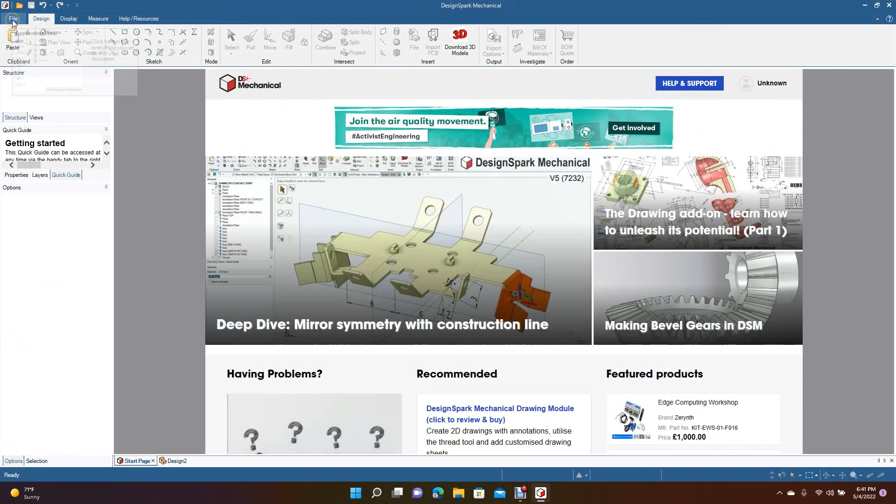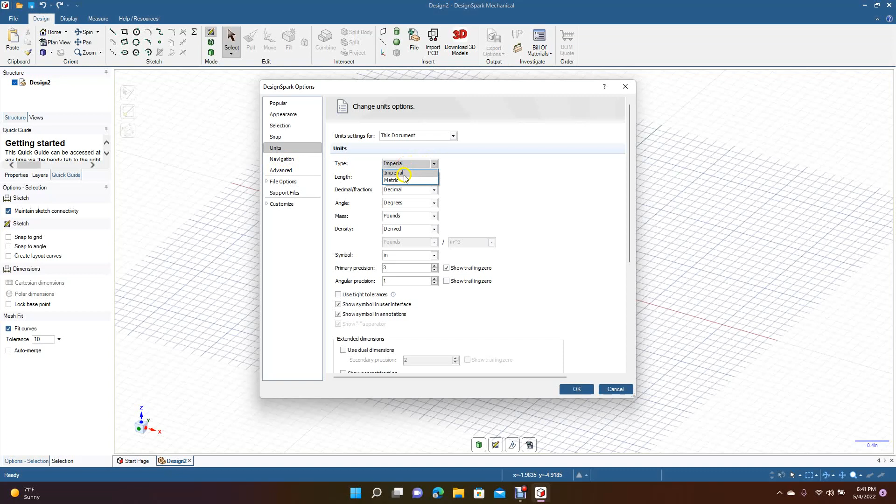We're going to come over here to File and go down to DesignSpark Options, navigate over to Units, make sure that we're not in inches. We want to do this in metric, which is millimeters. We'll click OK. Go to the design. Sometimes you got to do that setting a couple of times to make sure that it switches over. So go to metric, click OK, and when the grid gets smaller, you know you're in metric.

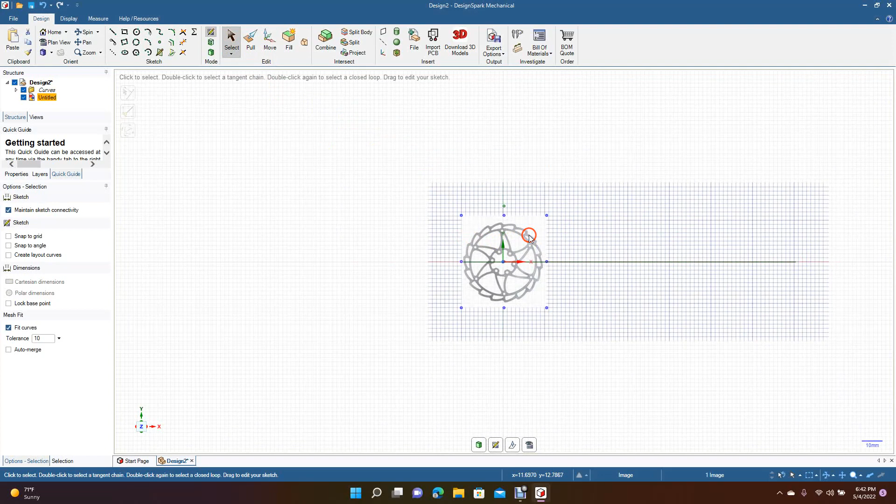So okay, we're going to go ahead and use this one as an example. We'll go ahead and put that in the middle best we can. We want this to be 160 millimeters, so we're going to go ahead and create a line right here as a reference, and then we're going to type in 160. This is going to get pretty big, but we'll go ahead and just scale that up. And we're going to go ahead and hold down Shift, and then we're going to drag these corners. Okay, that's way too big.

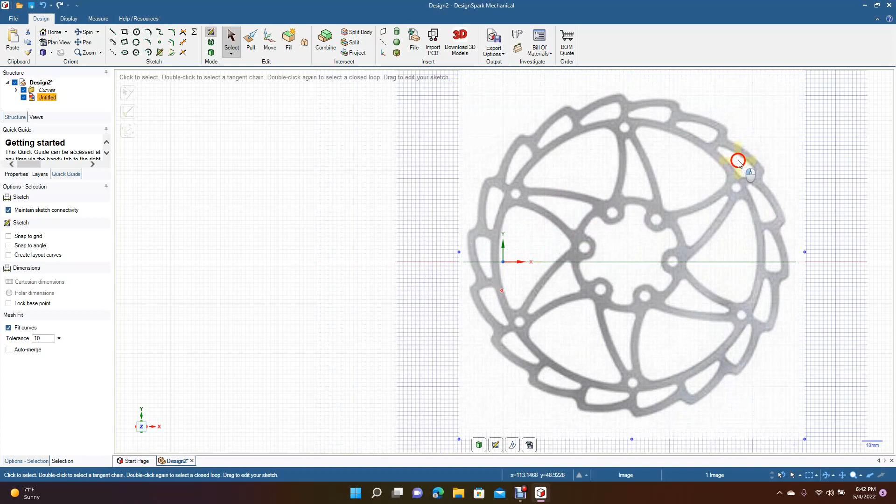We'll just go ahead and hold down Control. Just make sure that it just needs to be a little bit bigger. Probably right there is good. Yeah, a little bit bigger and that'll be okay. Hold down your Control. That should be good. Okay, we're going to get rid of that reference line that we created. And we're going to put this right in the middle there. Now we're not going to make this one exactly. We're going to kind of do our own thing, but I'm going to basically show you how to do it.

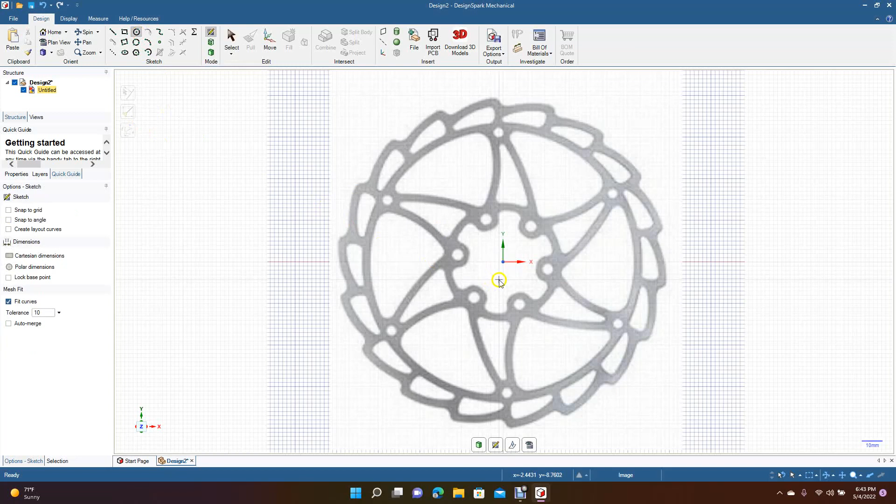So we'll go ahead and get the circle tool out. We want to put a line up here. Our first dimension is going to be 160. That's going to be the dimension of the disc brake. And we're going to get another circle. We'll go ahead and go up to here to draw this one. We'll just make this 134. And we're going to draw another circle from the center. And we're going to make this one, let's just go 126. That should be good enough.

Okay, now we'll put some of the smaller circles in there. This one's going to be 57, and then we're going to do another one where these circles need to be, and these circles are going to be 48 millimeter. So we're going to go ahead and draw a circle in the middle here, and we're going to type in 48. So this is about where we should be drawing these circles. So according to that little graphic we have, this 48 is from the center out to the center. Okay.

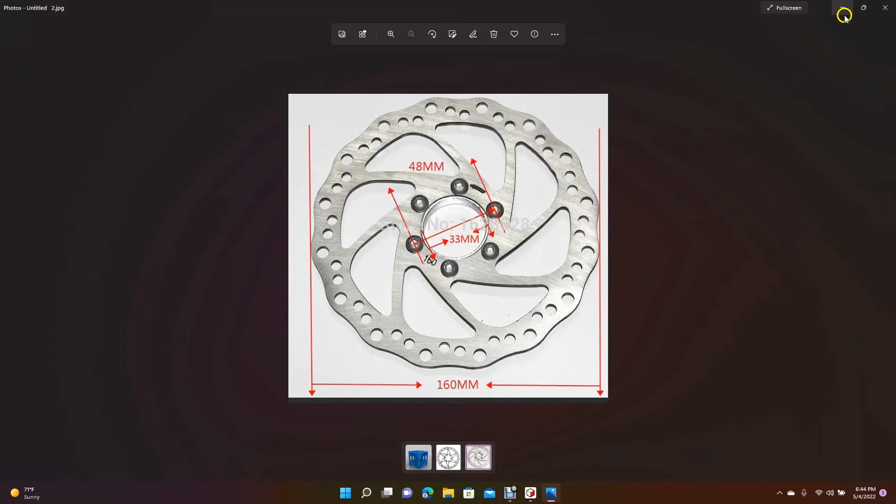And there's 1, 2, 3, 4, 5. There's 6 of them. Okay, so 48 from center to center. So what we got to do is make this a little bit bigger. So we're going to delete that and draw another one. Do this about 60. Okay. Right now we're going to go ahead and let's go Control plus. We're going to draw our first circle here.

I think these are going to be 5 millimeter holes. Yeah, we're going to go 5. Just move this around, make sure that 5 is good. Let's go get the move. Let's move this down. Yep, 5 millimeters should be good. Okay, so now what we're going to do is get the circle out again. We're going to drag one for the outer circle right here. And we're going to make this 14 millimeters. Let's go 14.

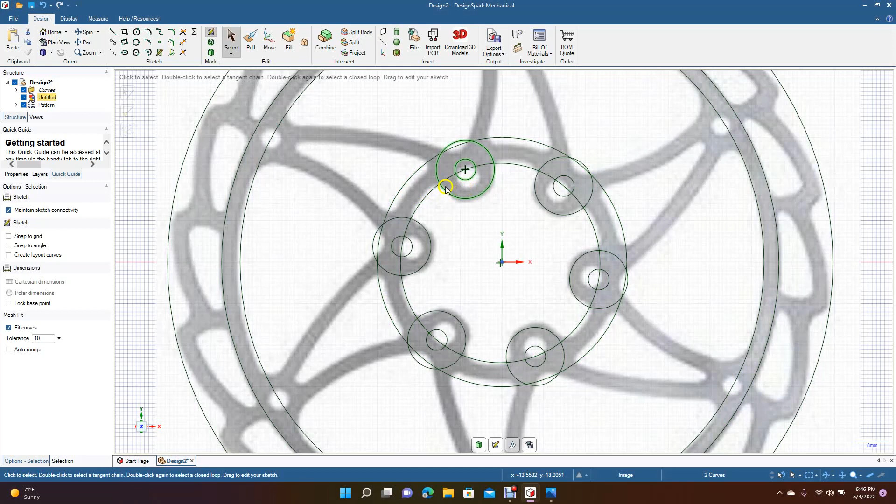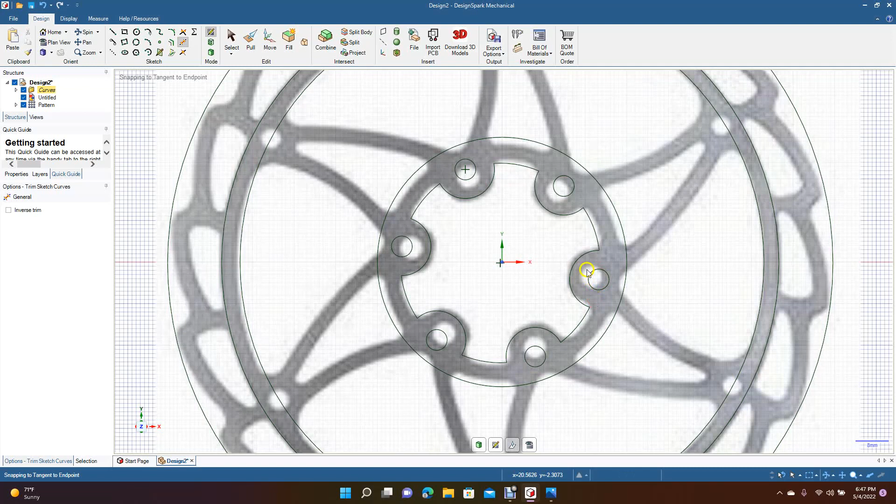All right, now let's get our trim away tool. We're going to start cutting these pieces here. Okay, let's get that one in the middle. All right, just continue around till you've got all these nice and cleaned. Oops, undo. Let's get that out of the way, and then get these two little inside pieces. Okay, outside, and then do the insides. Do the insides here, and then the insides of the circle. Okay. Let's get rid of those. Okay, that doesn't look too bad. We'll Control minus.

So that's going to be the base of our disc brake. Let's go ahead and pan down. We're going to have to create one of these here, and then we're going to rotate it around, but we're going to make our own. We're not going to do this exactly. So we're going to go ahead and do the 5 millimeter circle there.

And we're going to grab the circle again. Let's go from the center. We're going to make a 14 millimeter circle right there. Okay. And then we're going to draw these little pieces here, and then we'll just rotate that around. So we're going to go ahead and get our 3-point arc. We're going to go from there to there.

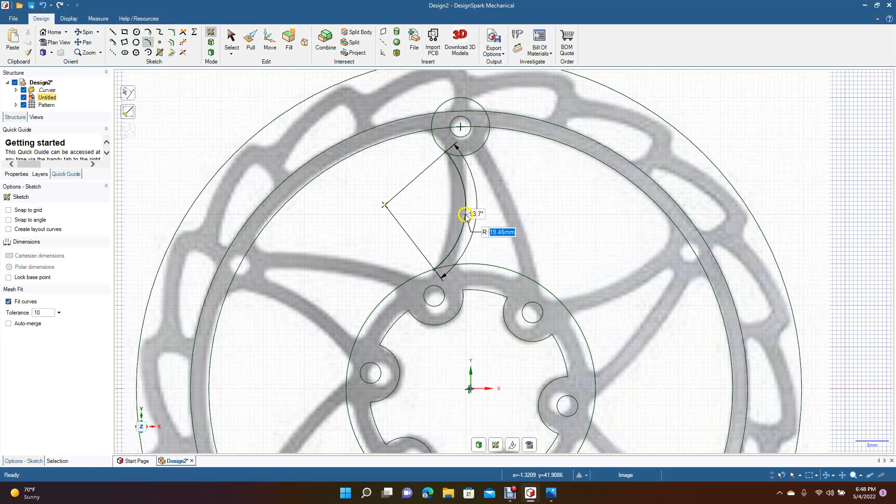Actually, I want this to be more, we're going to use our tangent arc. We're going to go tangent to these. Don't have to be exact. I kind of just want to do my own thing, so I'm going to use kind of a guide there. So we'll do a tangent line here, and then we're going to go grab that same one up here, and then we'll go, and I kind of want that to be curved.

Let's try the 3-point arc on this one here. Still not getting the right one. Let's undo that. Let's get that tangent arc. Let's try, go from there to there. And let's try the tangent arc again and go from there to there. That looks pretty good. I'm okay with that.

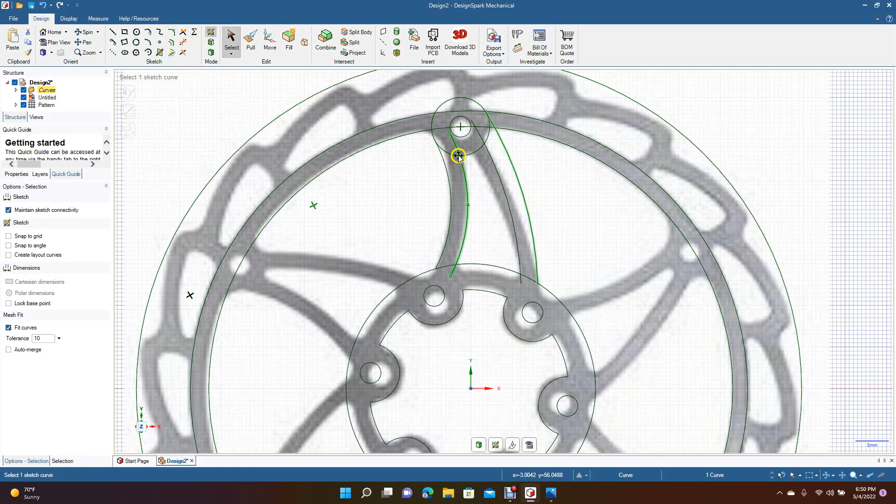We know that these lines are tangent, so okay, now we're going to get our offset, and we're going to offset this line here over. Let's go 4 millimeters and do the same on this one. 4 millimeters. Okay. Do I want to? Okay, yeah. Now we're going to go ahead and get our trim away. Let's trim away these.

And I'm going to go ahead and spin this around. So let's Control minus. Let's get our select tool. Let's go ahead and, oops, I didn't want to do that. Let's go ahead and click up here. Select what we just drew. Just what we just drew. We don't want to get anything else.

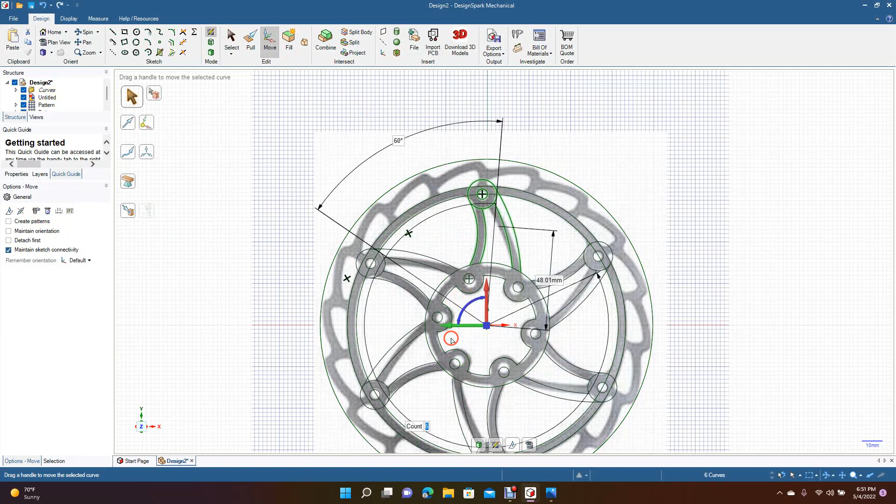Okay, now go ahead and select move. Go to create pattern. Drag this to the center. And then let's rotate this around. So we have 6. Go ahead and select to click off. Okay, that's looking pretty good. Okay, now we're going to go ahead and start trimming. So we'll go Control plus. We're going to pan down.

Get our trim away. Let's trim away this top piece. Let's trim away these inside pieces. Oops, undo, not that one. Or maybe I did want to do that one. Yeah, that one, that one, that one, that one there. Oops, undo. Okay, so it should look something like this. And then get rid of these. Okay, that's not too bad.

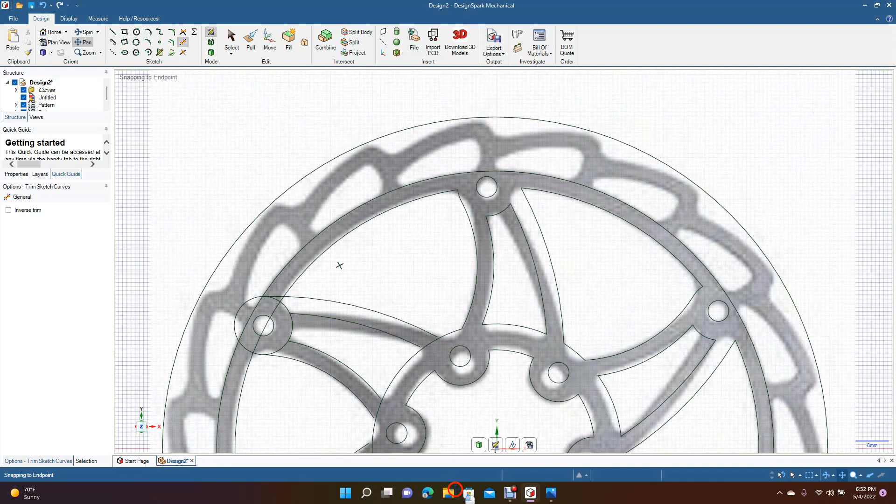So let's go ahead and pan up and we'll just work our way around. The trim away. And a little piece right there. Then these two here. Piece right there. Okay, let's continue to pan over. Oh, we're missing a piece right there. Must have some of these, it looks like they're not coming. Let's go ahead and get rid of this. Control minus.

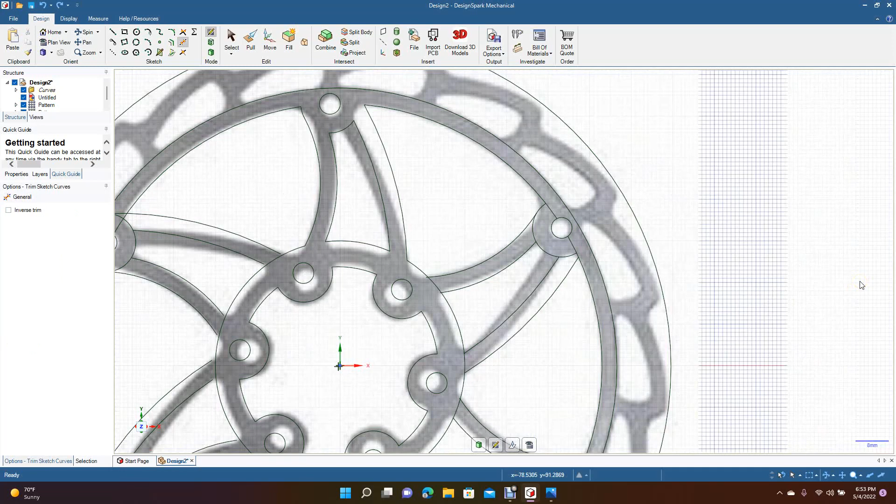Go Control plus. Yeah, it looks like this kind of didn't rotate completely from the center. So I'm going to undo this a few times. So hopefully I can get to that part. Okay, I'm just going to get back to the part where I have one of these. Okay, so we're going to go ahead and get rid of this graphic so it's not confusing. Control minus.

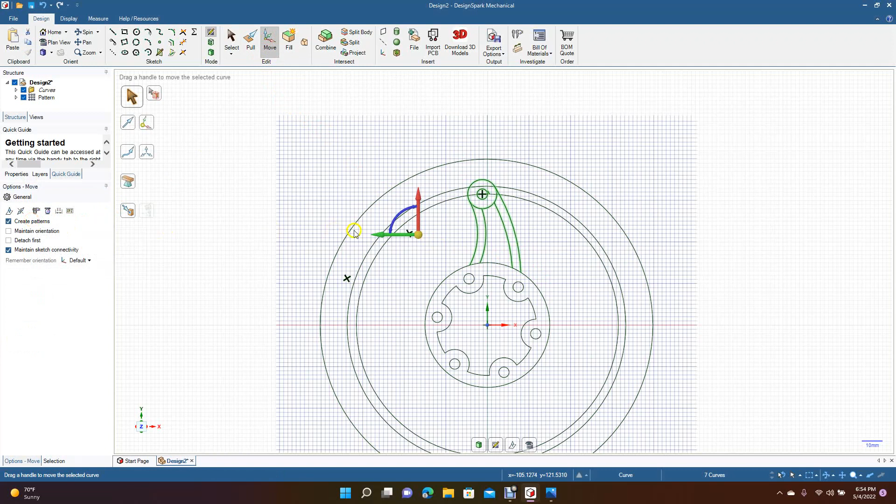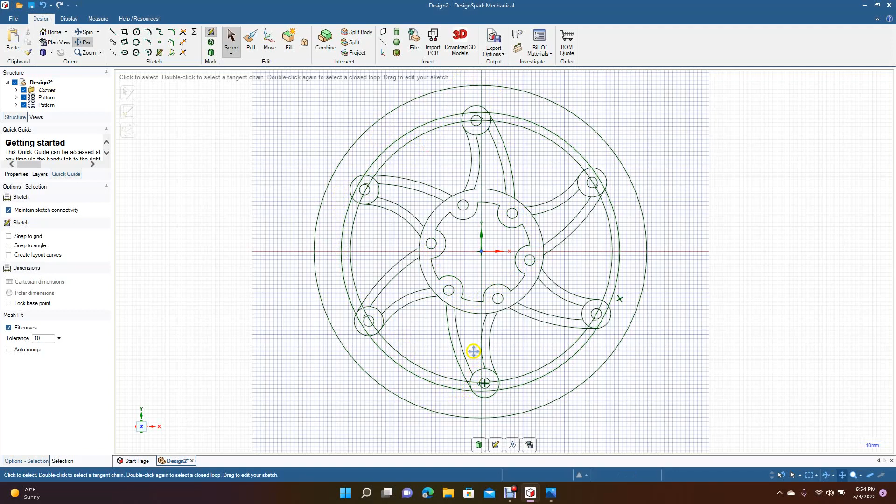And then now we're going to go ahead and copy these over. Okay, let's go ahead and move. Create pattern. Let's drag this to the middle. And then we want 5. That's good. Go ahead and, or 6. Go ahead and select there. 1, 2, 3, 4, 5, 6. Then we want the actual rotor part. Okay, this looks a little bit better, but it still looks like it's off for some reason.

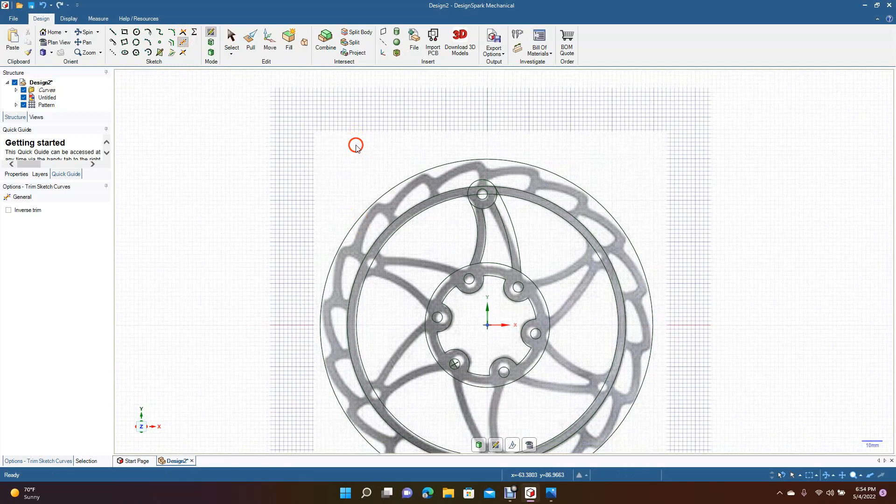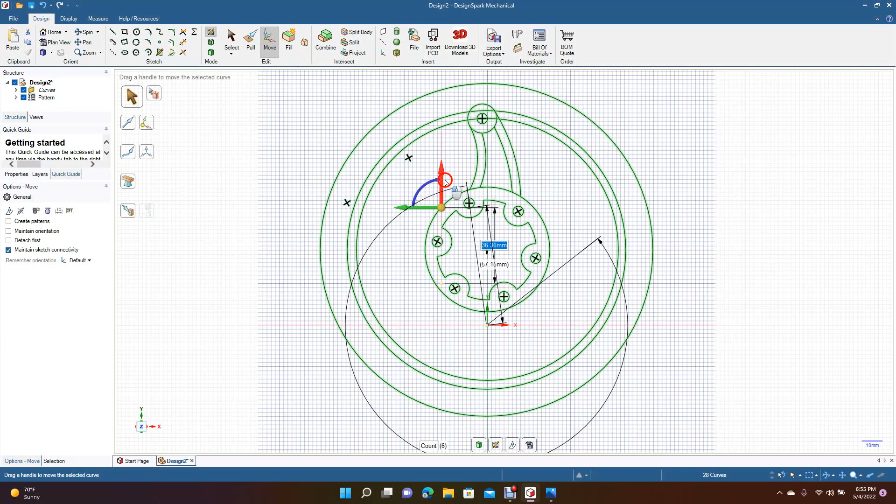Undo. I'm gonna try one more thing with this. Get rid of this. Could be off because of this grid. I didn't have snap to grid on, so let's get rid of that. Let's select this and just move it. Oops, undo. Let's get rid of that. Select all, go to move. Okay, it looks like there's like a double kind of line there. Alright, not really sure why there's 2 of those.

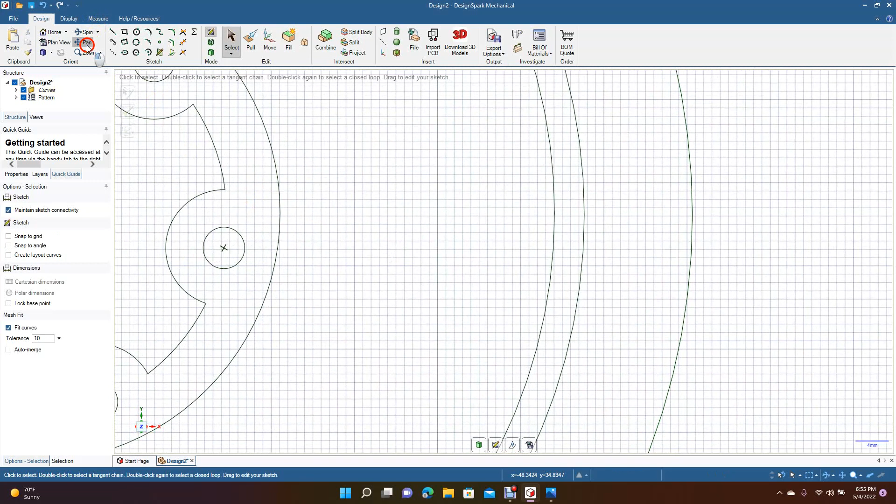Alright, that's part of the problem right there, is there's 2 of these things. And I'm not really sure why. Okay, let's make sure that one we got rid of is the center one. Alright, so when we move it, it has to go over to this one. Alright, let's see which one that is. Because now I'm kind of like... Okay, that's 126 and then 134. Let's just redraw these.

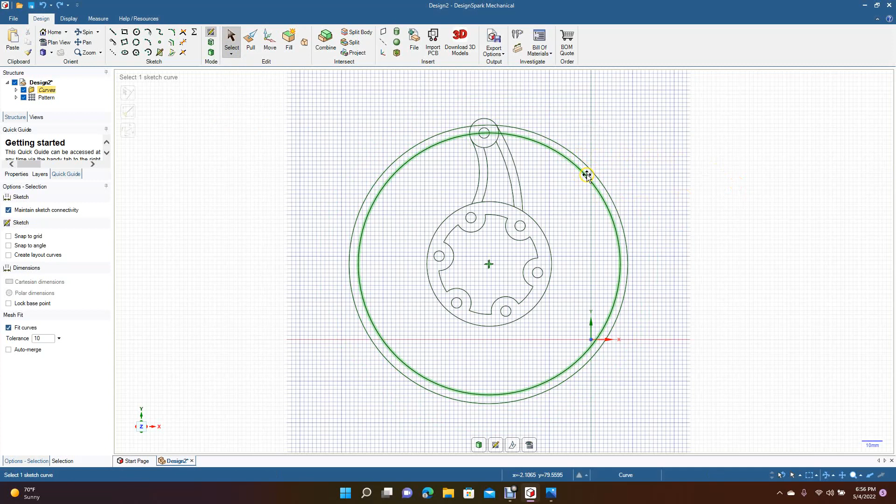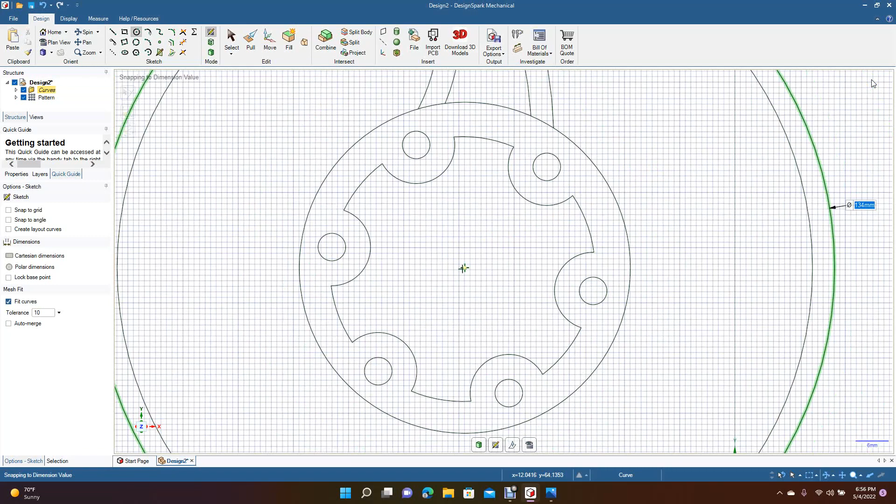Okay, get the circle. Still double there. See, there's two of them. Let's just go from there. Okay, type in 126 and then we'll go it again. Zoom in when we do this one. We have to go to the second circle. Type in 134. Control minus, or 136. Okay. Control minus. Alright, this should be better.

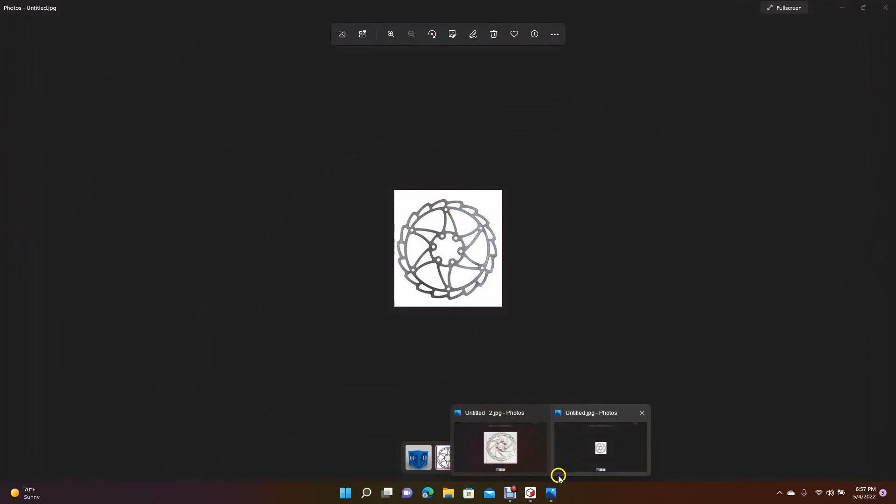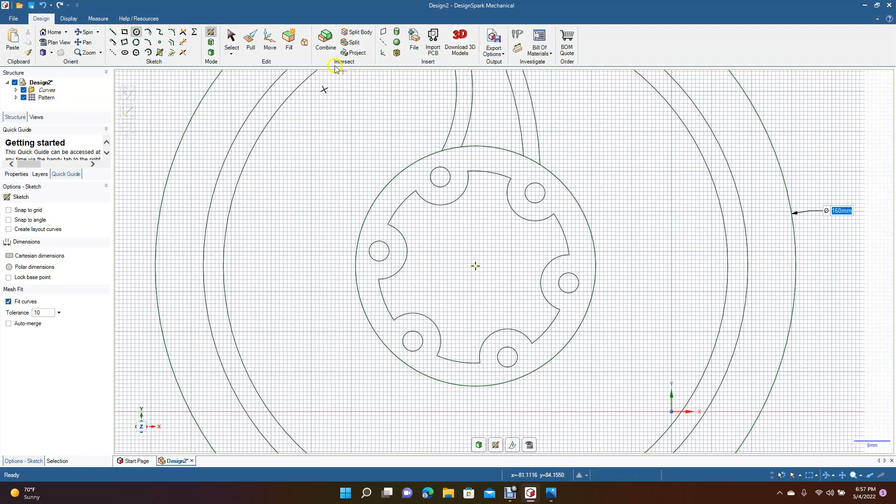Let me see what this is looking like. Okay, look up there. Let's get this other one. No, this actually has to be 160. So there's another one out there. Let's go circle, Control plus. Go to the second one, 160. Okay, there we go. Control minus. Now let's grab all this.

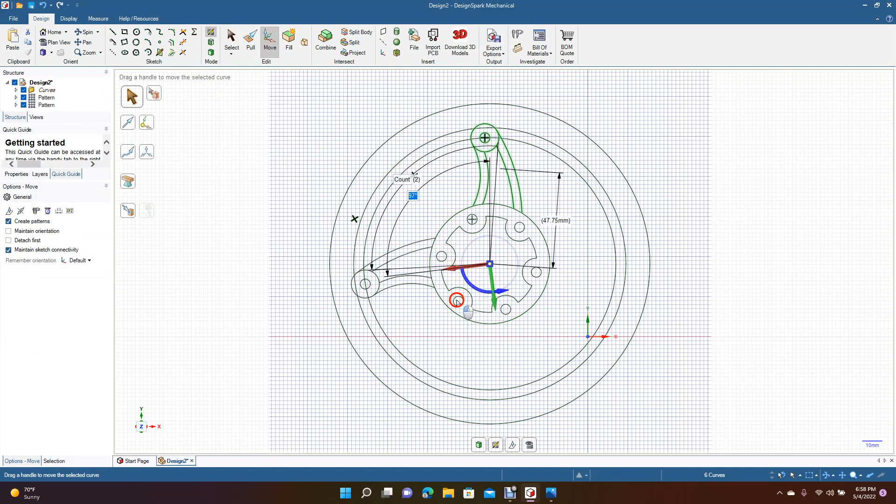Go to move. Let's go to create pattern. And then we got to drag that to there. Let's go 6. Okay. Now they should all be connected. Okay, for some reason there was an extra plus in there and it was throwing everything off. So let's just go Control plus. Let's go ahead and start trimming now.

Okay, this should be this one here. Make sure you get all the little lines. Don't want to have any leftovers. Oops, undo, not that one. This middle one, oops, not that one either. Okay, so these two are good. Let's go pan up.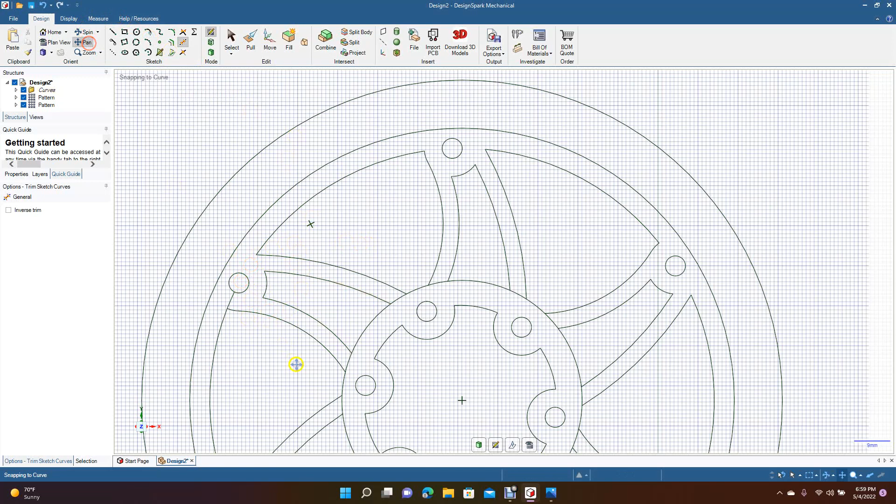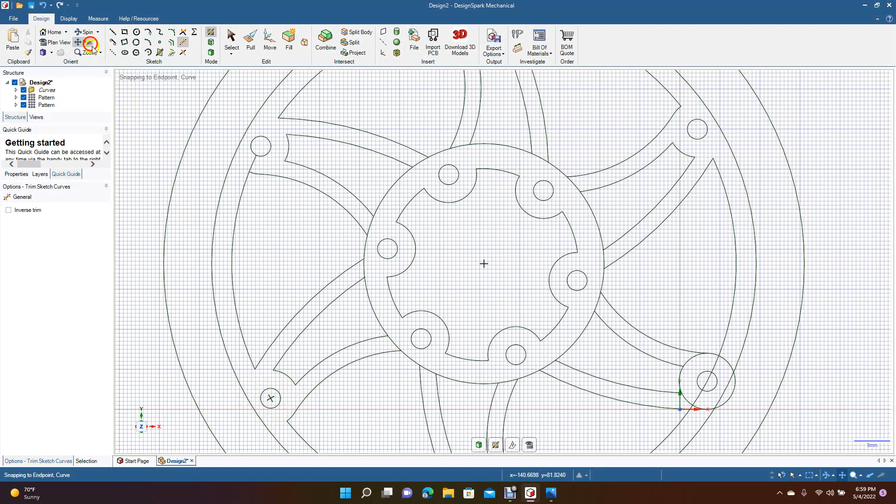Let's get the trim away. Okay, that's looking good. Let's go ahead and get the trim away. Get these. Let's get these two right here.

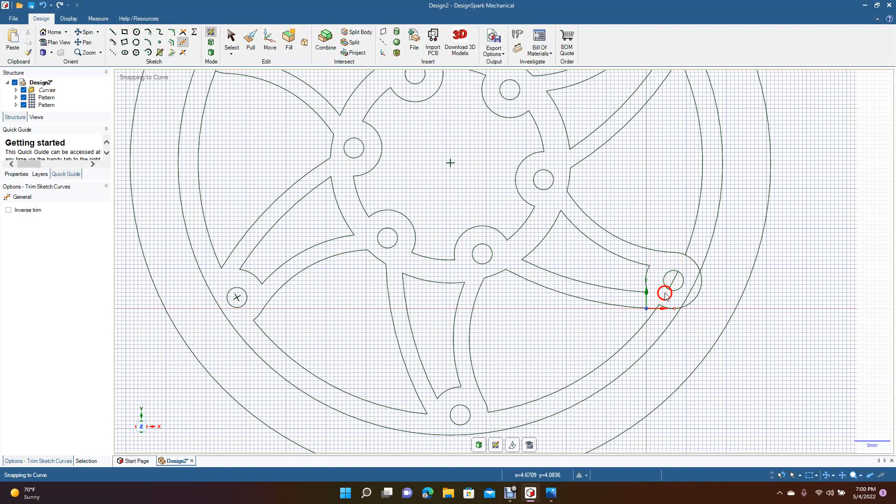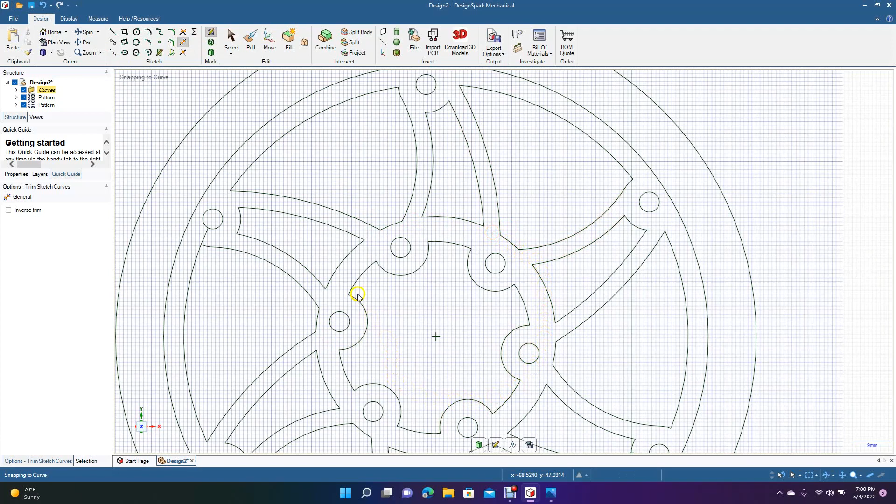Okay, let's go ahead and pan. Looks like you got everything. Just get these trimmed away. Let's get these up here. Alright, this looks good. Trim that away. Control minus. The only thing you have to do is add the little marks up here.

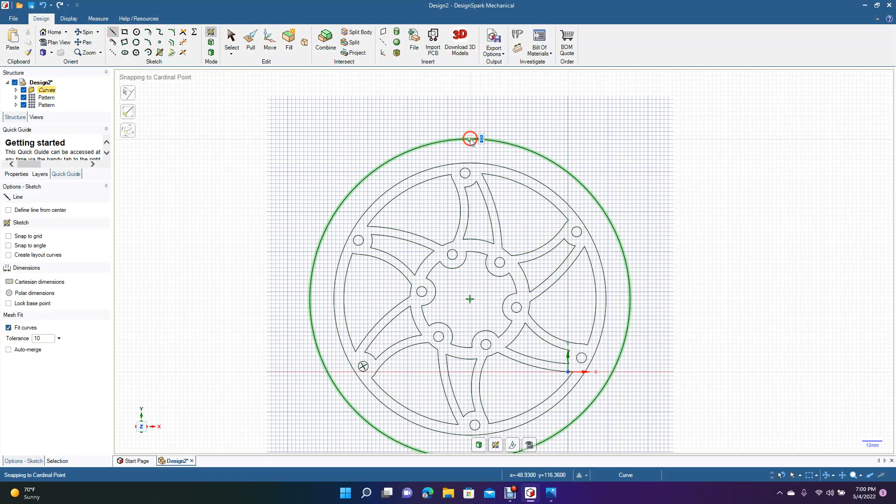I'm just going to add some simple circles. I like this how it is. I don't want to complicate it too much. So let's go ahead and put a line in here. Just go like that. Control plus, Control plus. Go ahead and pan down. Maybe do like a little 3 pattern. So we'll put one in the middle.

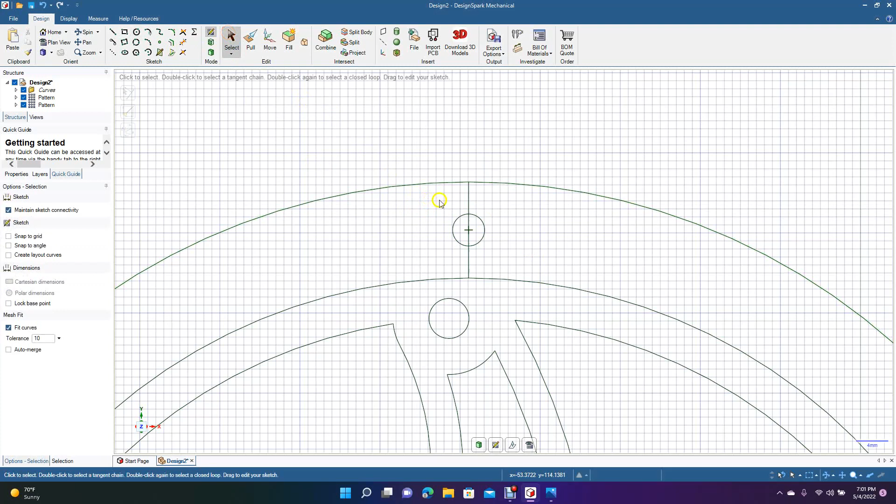We'll do these at 4 millimeters. Let's go for one there. Then we're going to put another one. Let's turn this into a mirror line. Set as mirror. Now we're going to put one up here. 4. And then we're going to put a couple down here.

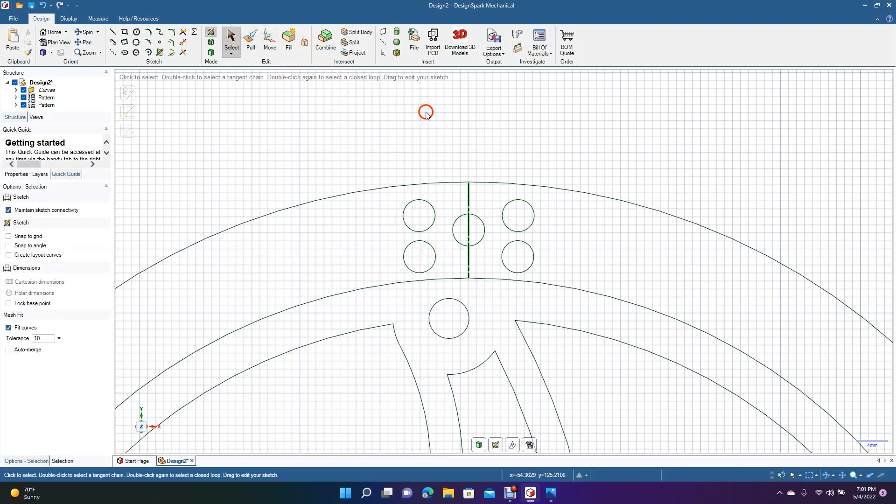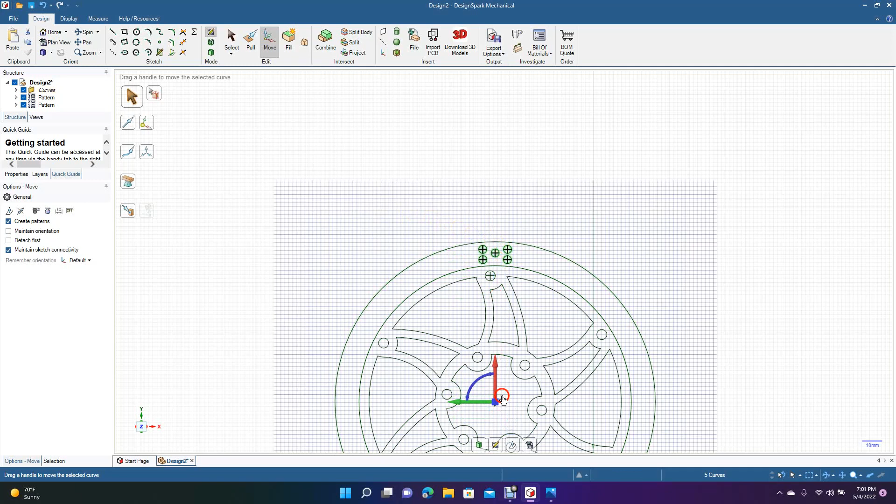Okay, that looks good. I'm going to go ahead and select these. We're going to move them up to there. And we're going to get rid of that. Let's select these again. Go Control minus, Control minus. Let's go create pattern. Let's drag this down to the center. And let's go ahead and rotate these. I'm going to put in 20 for my pattern.

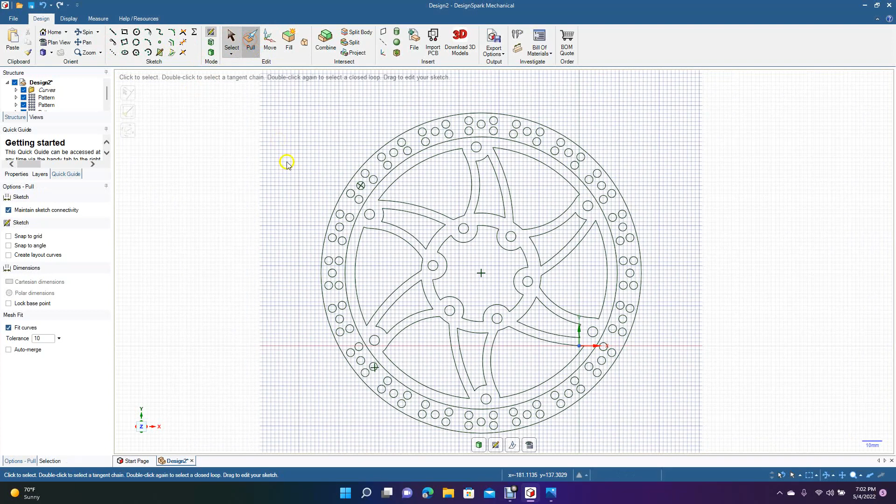Okay, so select and click off. Let's make sure that this got the right center one so they're not offset. All right, this is good. So now we got to start adding some detail. Actually, let's just extrude this first. And then we'll go ahead and get the details. So let's get rid of these pieces in the middle that we don't need. Delete. And we have to get rid of all these little circles. Well, that's going to be tedious.

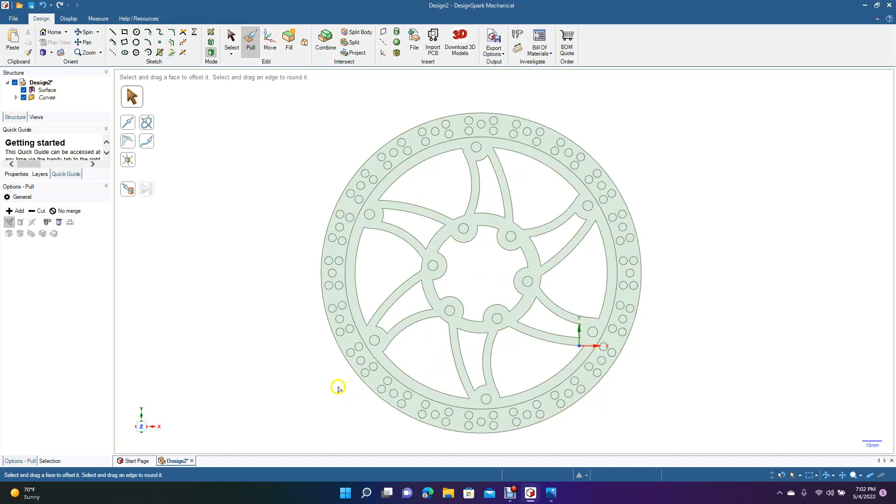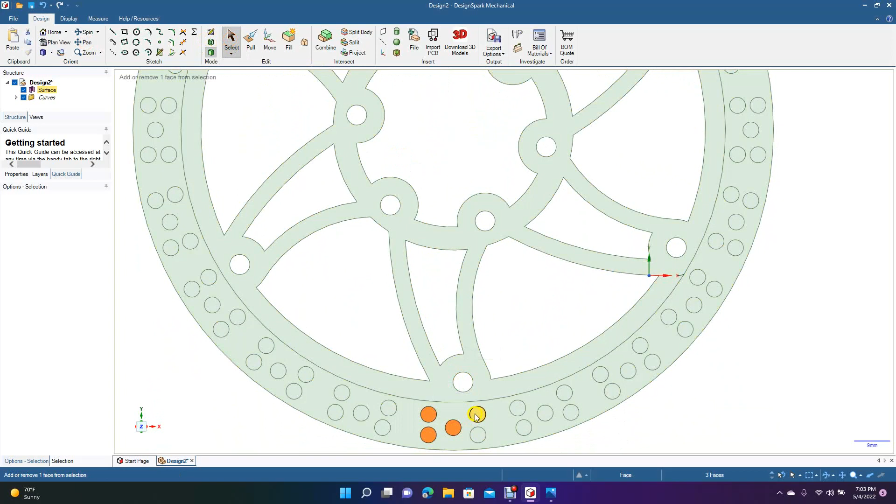Okay, let's go Control plus so we can see them. Just hold down the Control key. Get rid of all these. It's going to take a little bit, but want this to be right. Delete. Let's pan down. Get rid of that one. Okay, let's pan up. Let's get rid of that one. Okay, now let's just start selecting these. Delete. You can just do maybe 2 at a time, so it's not so tedious. Okay, delete.

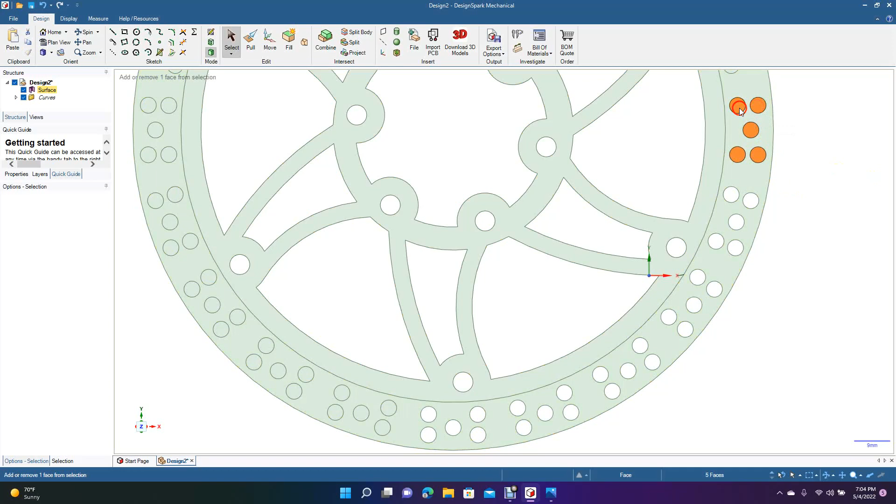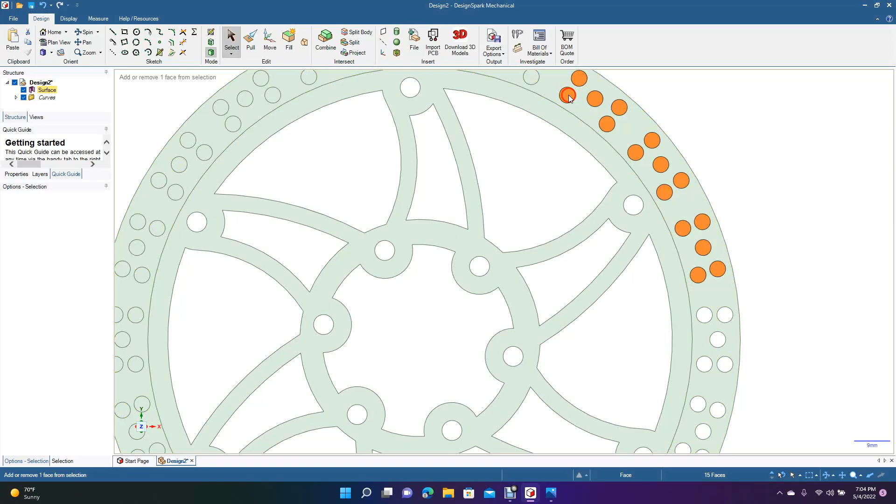These are going to be your little cooling vents. Delete. Go ahead and pan down. Let's get these. Just take your time. Make sure you hold down the Control key so you can get multiple selections. And then eventually we'll be able to extrude this. Wonder if I can drag a marquee. Yeah, let's try that. Let's drag a marquee around these. Make it go a little faster.

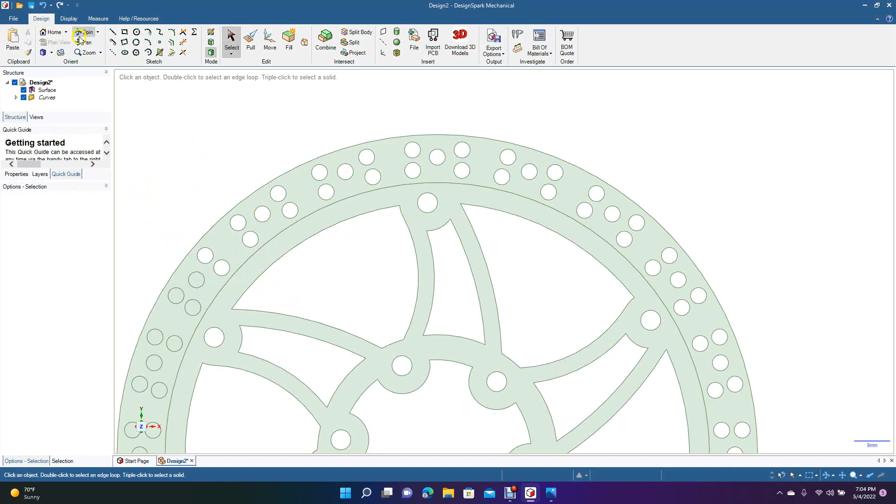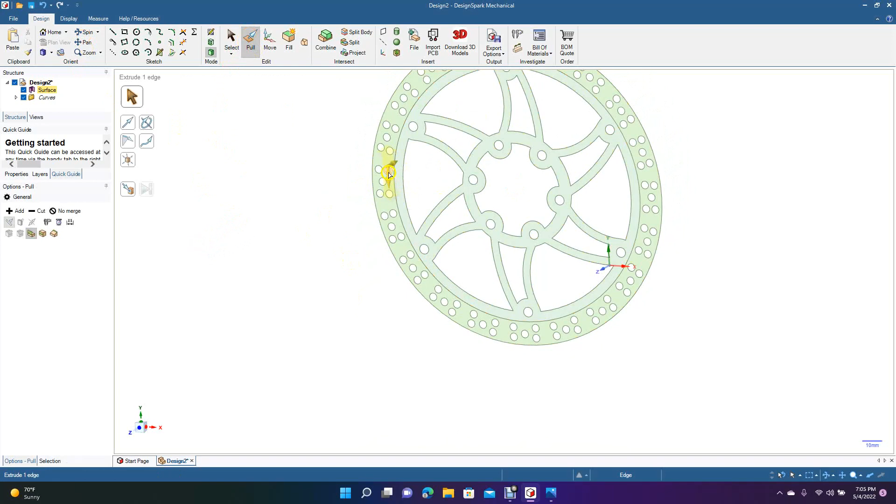Let's pan over. Get the select tool. Delete. Delete. Pan up. Let's get the select tool. And then get rid of those. Okay. Control minus. Now we're going to go ahead and spin. We'll pull this. I'm going to pull that one, that one. I think maybe just do 5 millimeters. Might be a little bit too thick.

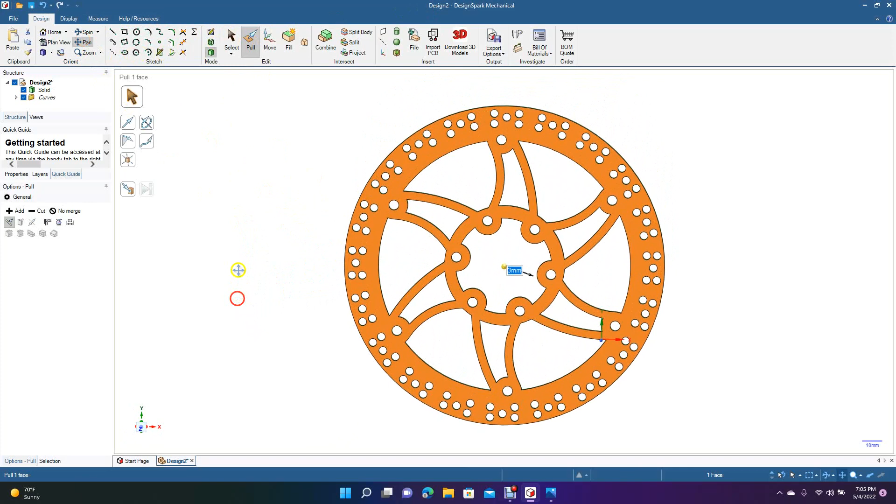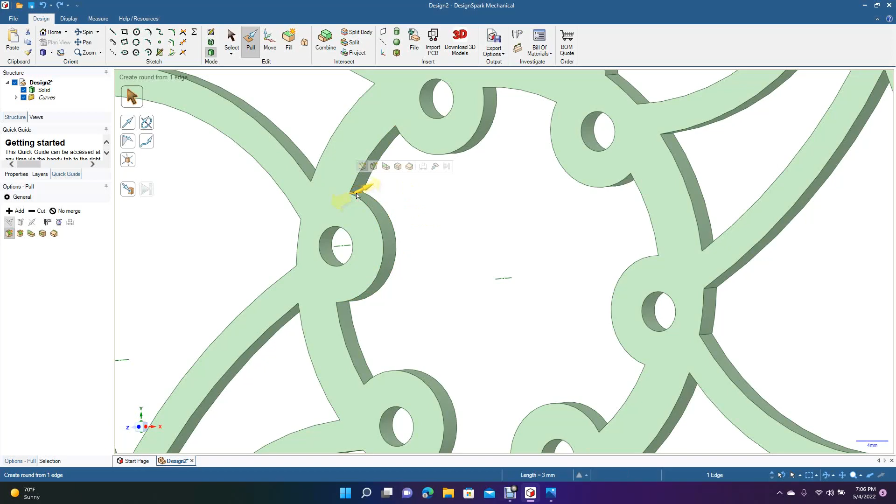Undo. Let's go ahead and undo this, and then we'll try 3. Okay, 3 millimeters looks good. Let's pan down. Go ahead and select and click off. Okay, this is going to be our disc brake. The only other thing I'm going to do is come in here and add some details. So we're going to add some fillets to here. Let's do 1.5 on these. Let's type in 1.5. Let's go to pull. Let's get these 1.5.

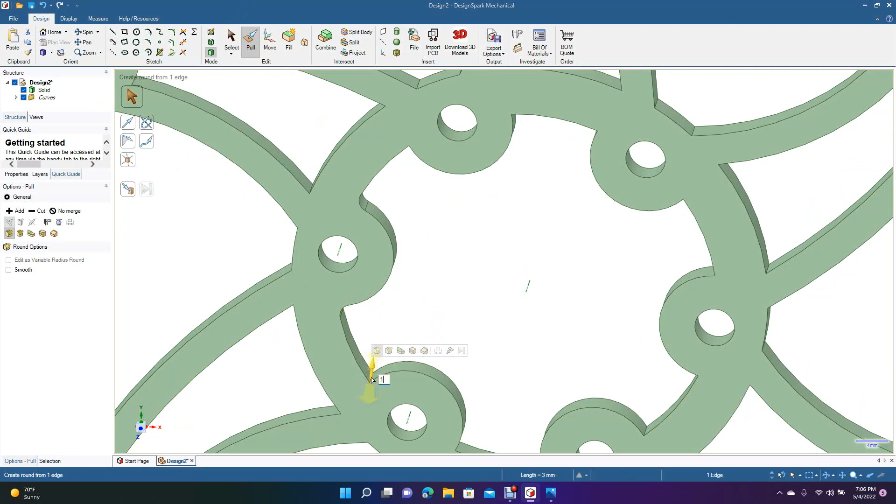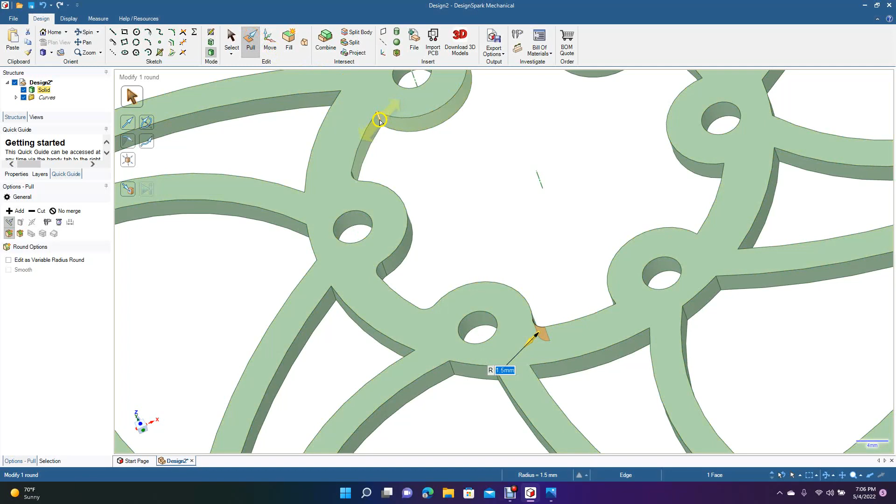It's going to take a little while to do these because you'll have to actually spin to be able to see where your line is, then spin and select your line. Okay, let's select that, go to pull, type in 1.5. Let's go ahead and spin. Get some of these at the top. 1.5. We can use our pan tool, kind of pull this over. Go to pull. 1.5. Let's get this one here.

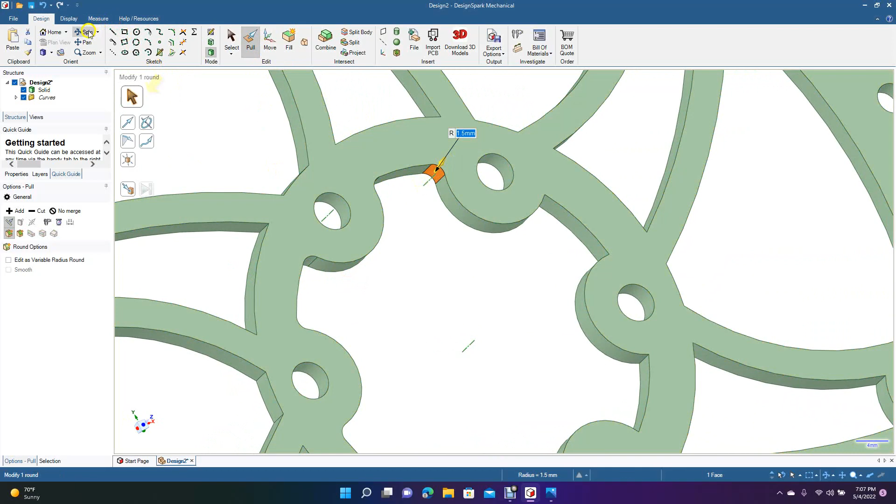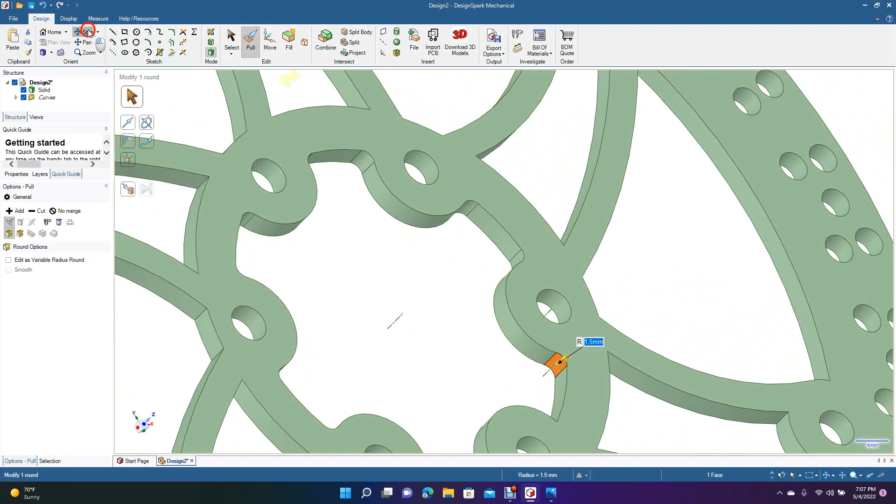This might be all I do on this disc brake for detail, because I don't want the video to be too long. This is just to show you guys how to create one, but you could actually spend a lot of time putting in a lot of the details here. But you know, if you are able to print this with metal, or even powdered stainless steel or powdered metal, you could print this out and run it through a tumbler, and then you'd be able to actually use this.

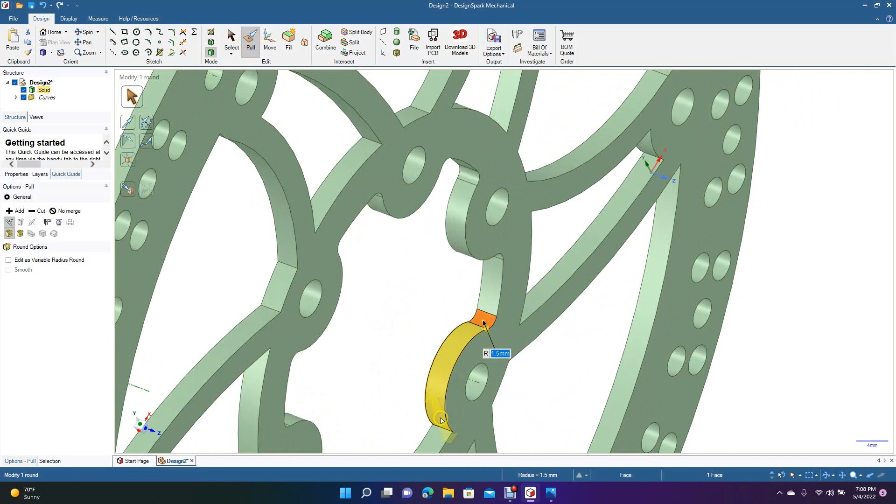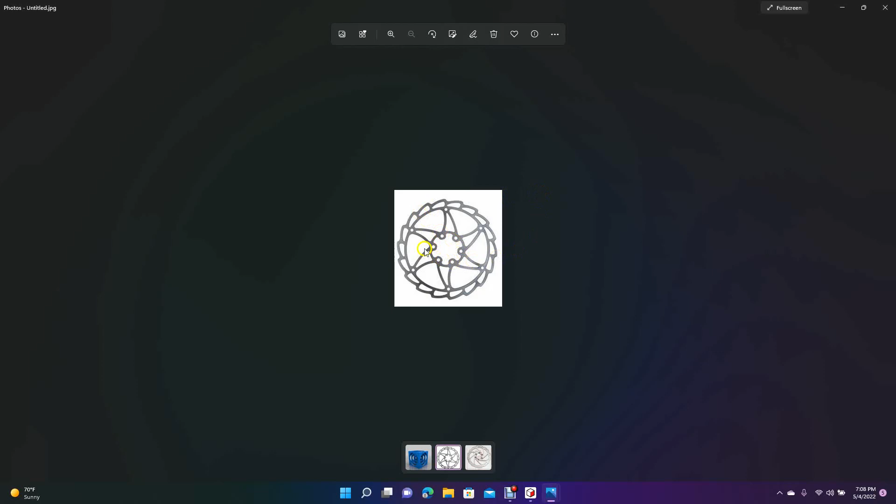Let's grab that one there. 1.5. Let's pan up. I think I got them all. Let's just do a quick little spin. Yeah, got them all. Control minus, Control minus. Okay, this is going to be our mountain bike disc. It's 1, 2, 3, 4, 5. It's got six points like this one. It's got some different ports than theirs, but didn't want to copy theirs exactly. So this is going to be ours. It's got some venting up here. It's got mounting bolts, and it's 160 millimeters.